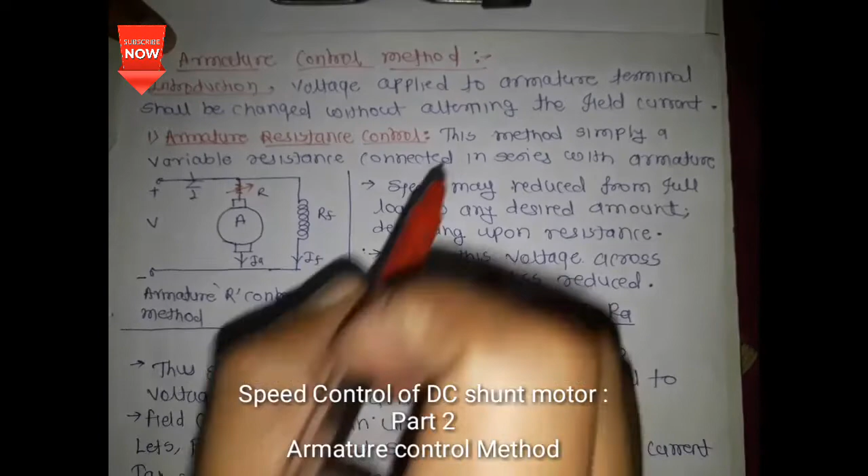Hello friends, now we start the video of armature control method of DC shunt motor. This is the DC shunt motor. Armature control method of DC shunt motor. In the previous lecture, we saw the methods and how we handle these methods. In this video we learn the armature control method.

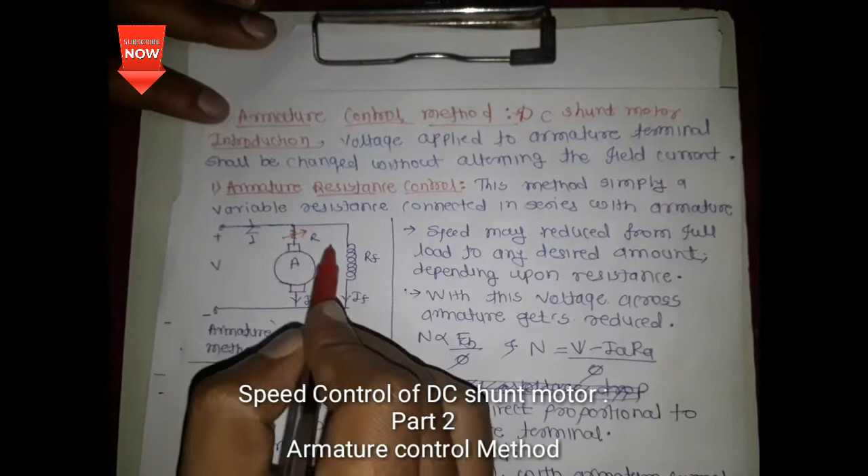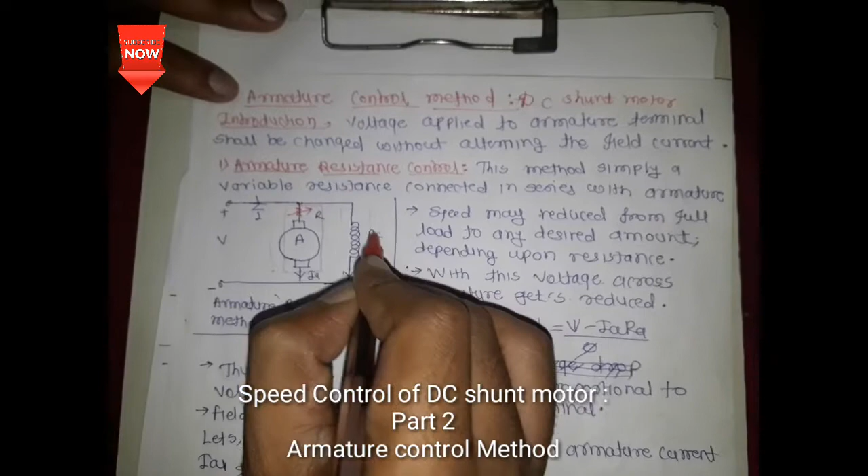Here we control the voltage level in the armature side only. Controlling the voltage level in the armature side only means that there is no change in the flux in the field side. So the first important fact you must remember is that the flux will remain the same in the field system.

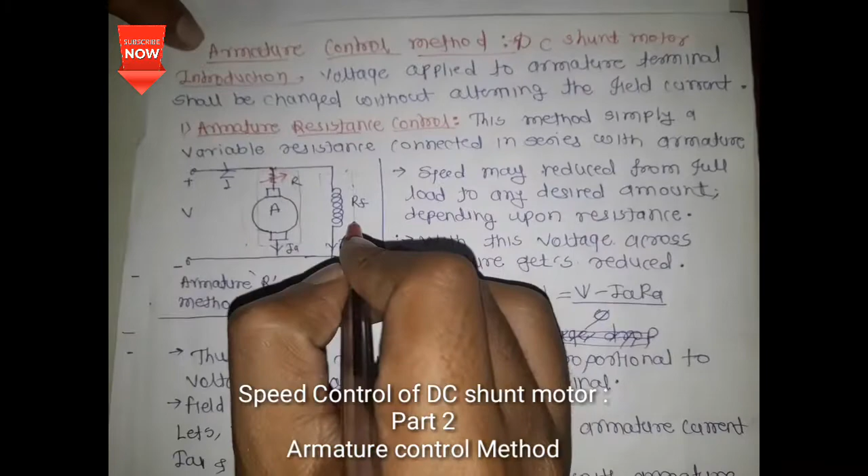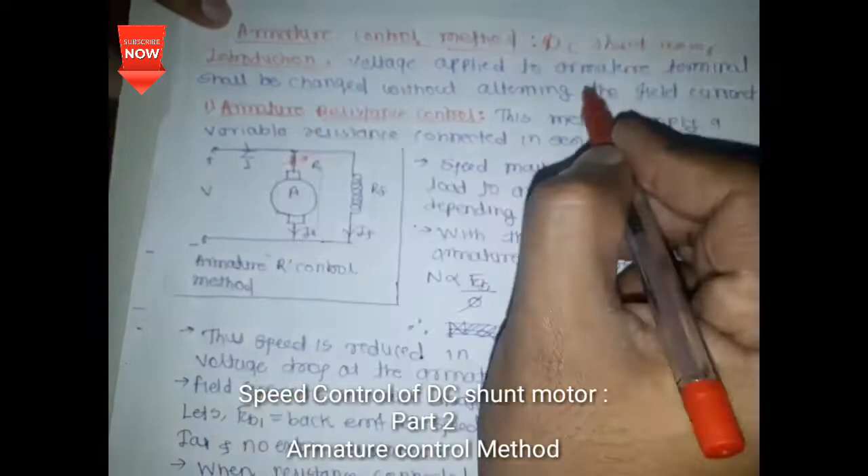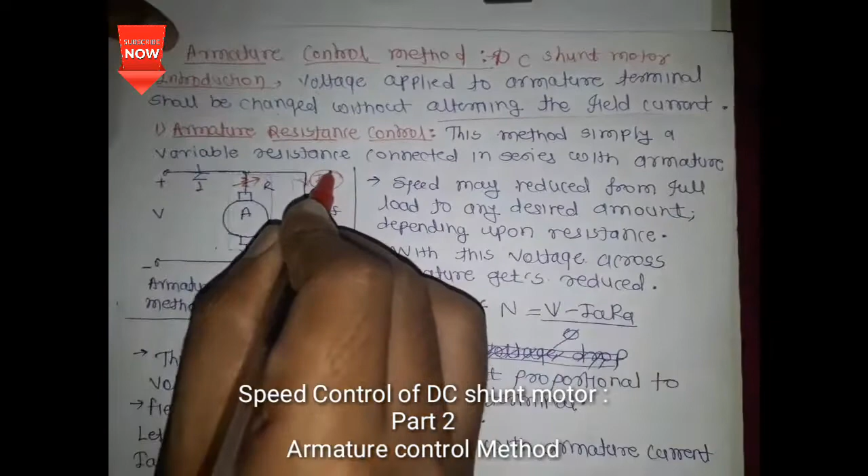In the introduction, we saw that the voltage applied to the armature terminal shall be changed without altering the field current. Means here the field current, that is IF, will remain the same. Whatever may be the condition, IF will remain the same. That point should be noted.

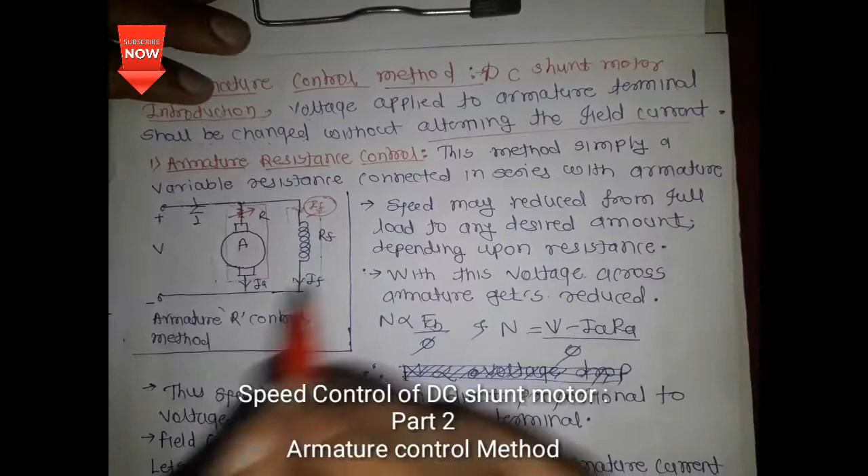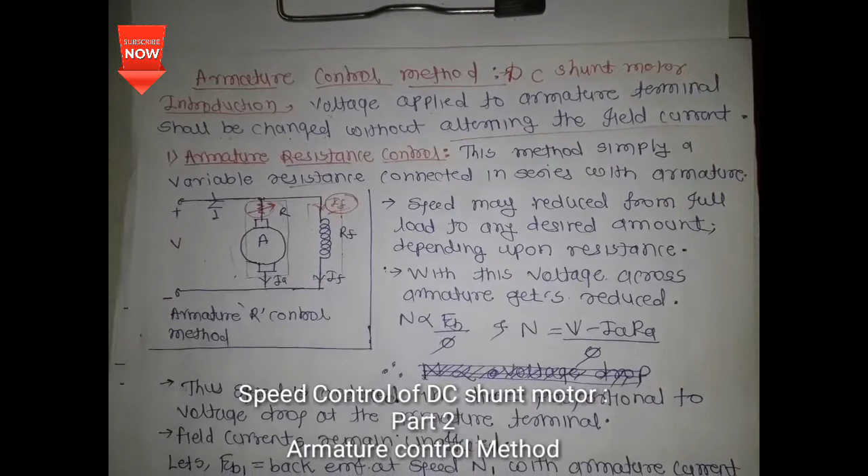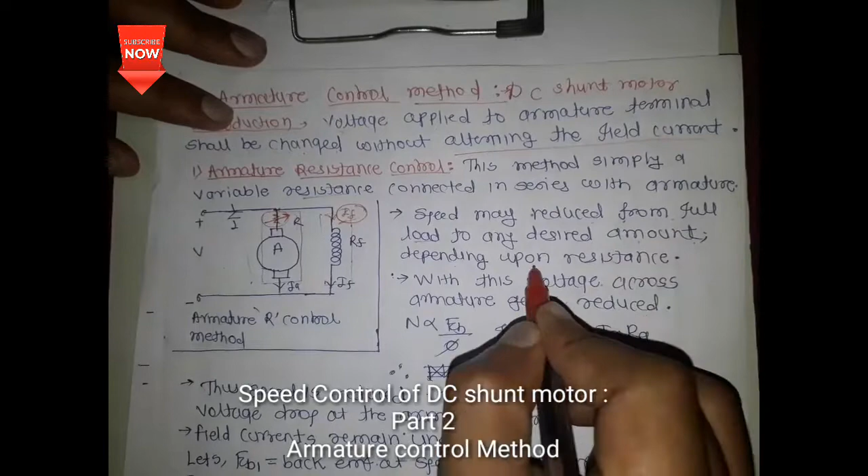Now, armature resistance control method. This is the first method. In this method, simply a variable resistance is connected in series with the armature, meaning a rheostat is connected in series with the armature circuit. Speed may be reduced from full load to any desired amount depending upon this resistance. The speed depends only on that resistance. How this depends we can see later.

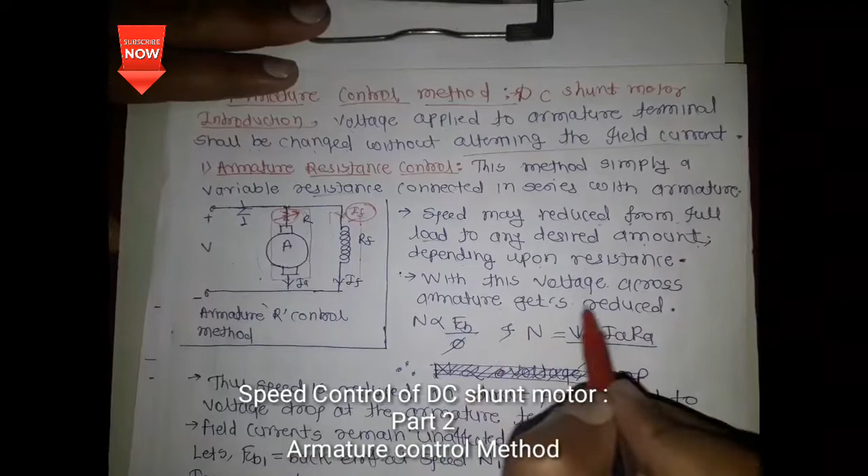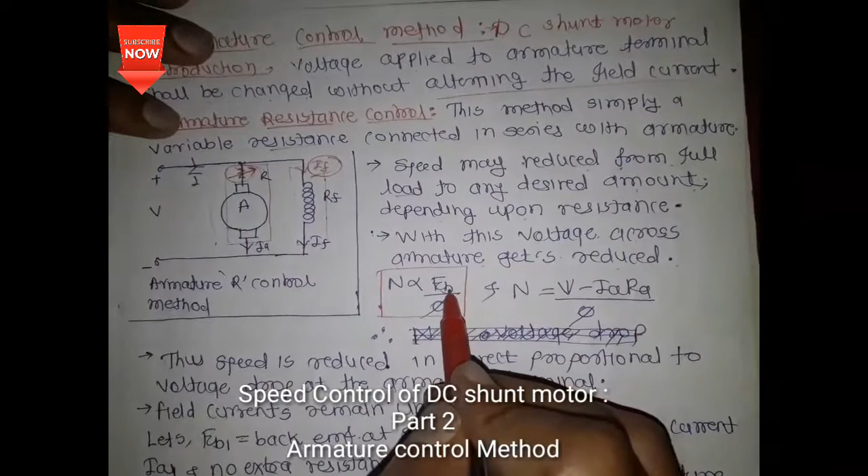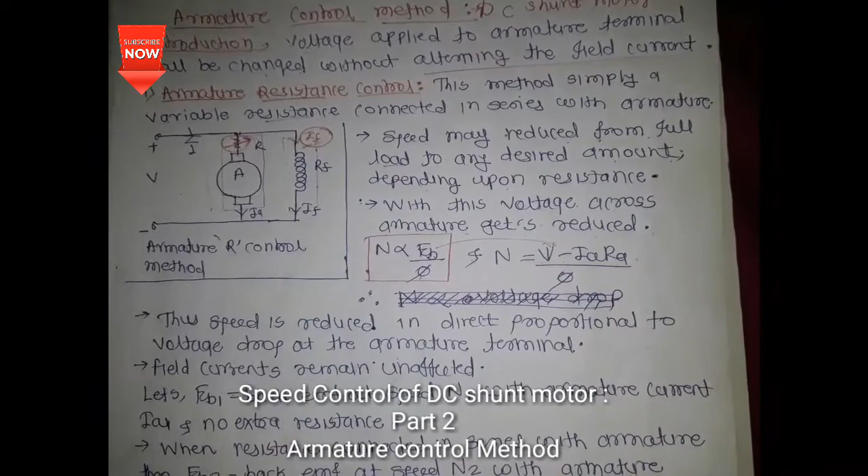With this, voltage across the armature gets reduced. How is this reduced? I told earlier that this is the very basic formula mostly used in the speed control methods: N is directly proportional to EB and inversely proportional to phi. Now EB is equal to V minus IaRa, as told in the voltage equation of the motor.

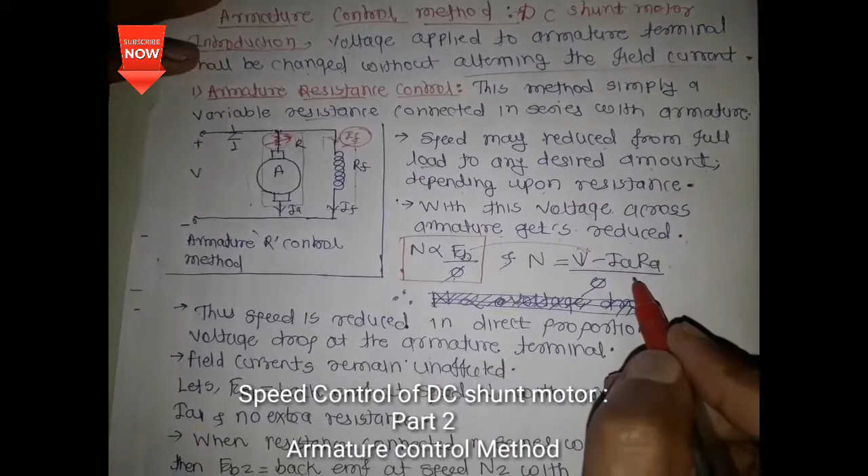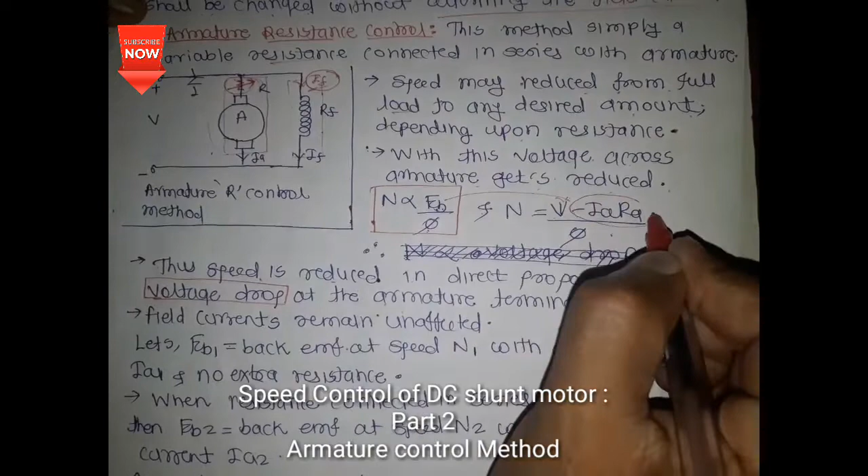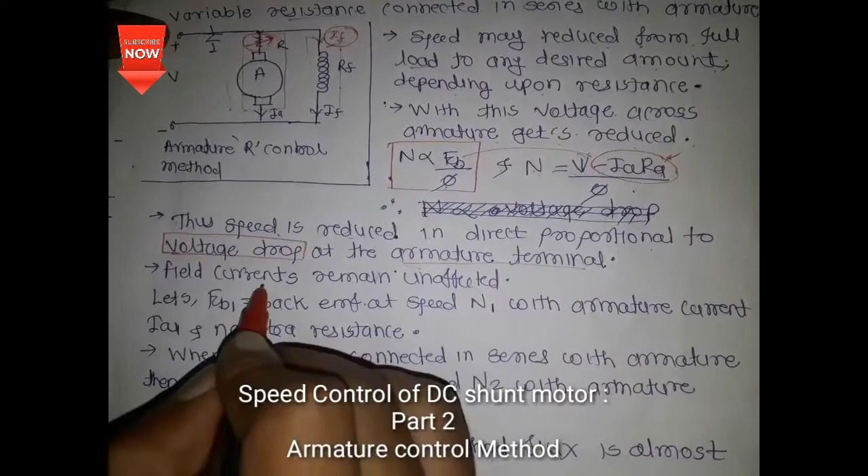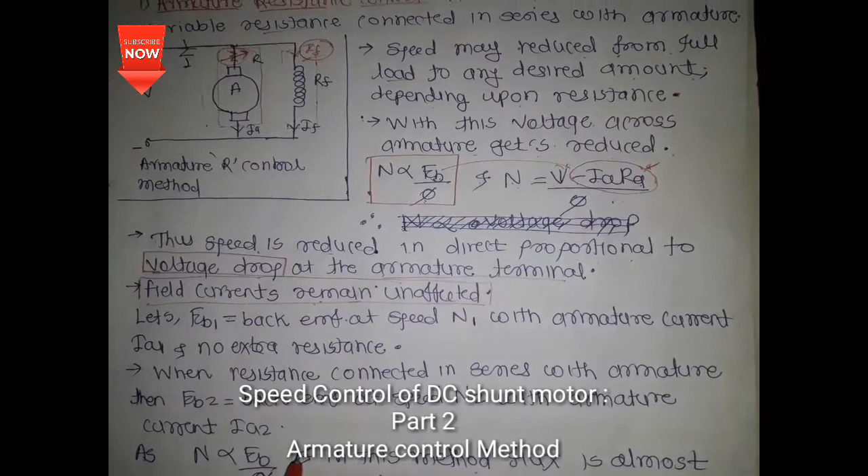Now, the speed is reduced in direct proportion to the voltage drop. As IaRa increases, speed gets reduced at the armature terminals. At the armature terminals, field current remains unaffected. That point you should note in your copy: field current remains unaffected in the armature control method of DC shunt motor.

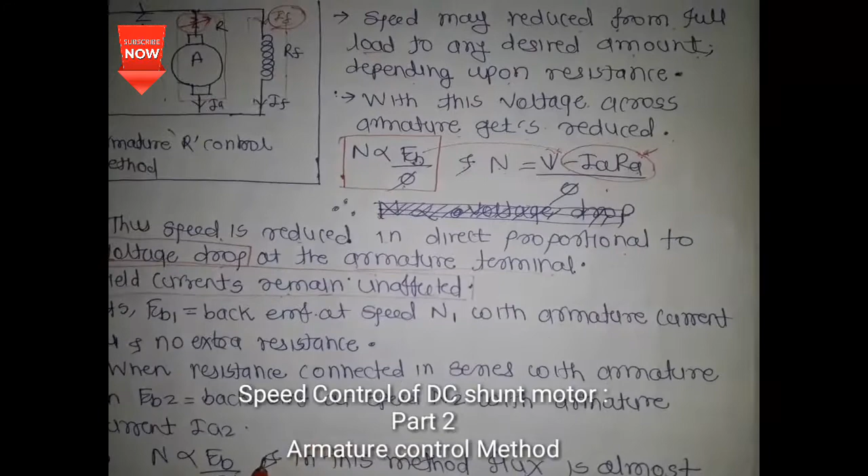In the field control method, the field current gets changed and flux does not remain constant, but in the armature resistance control method, field current remains unaffected.

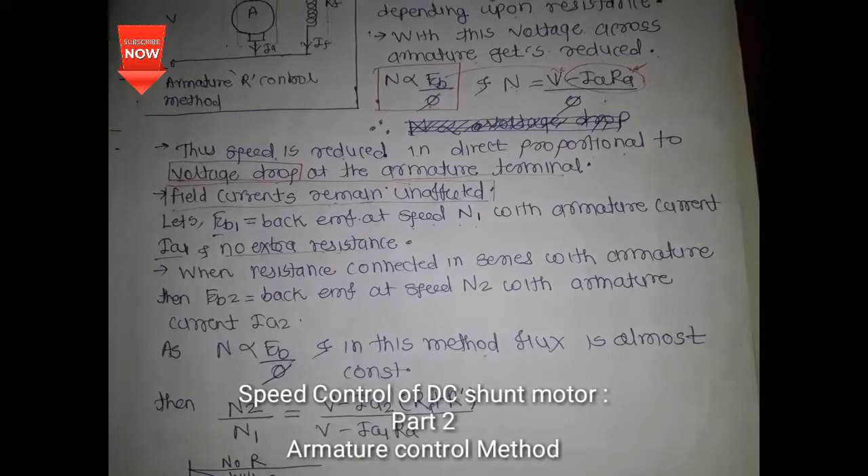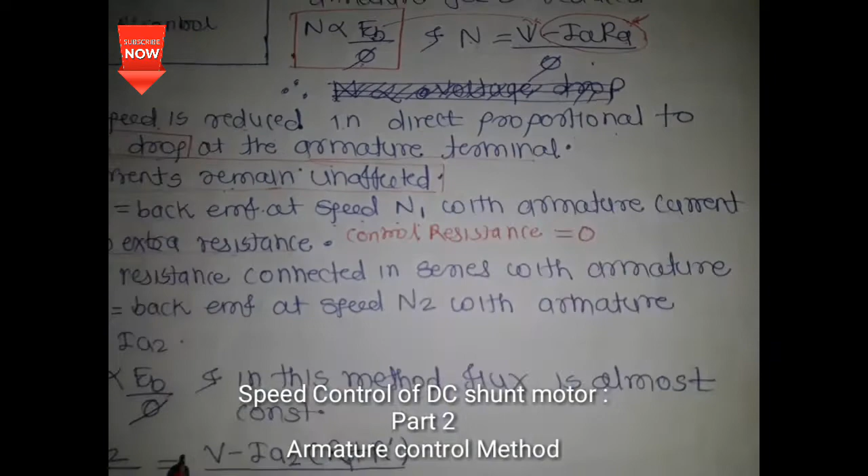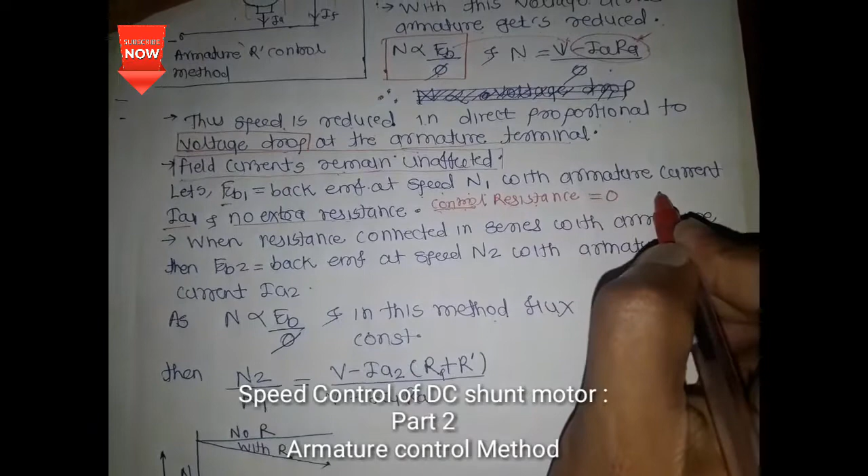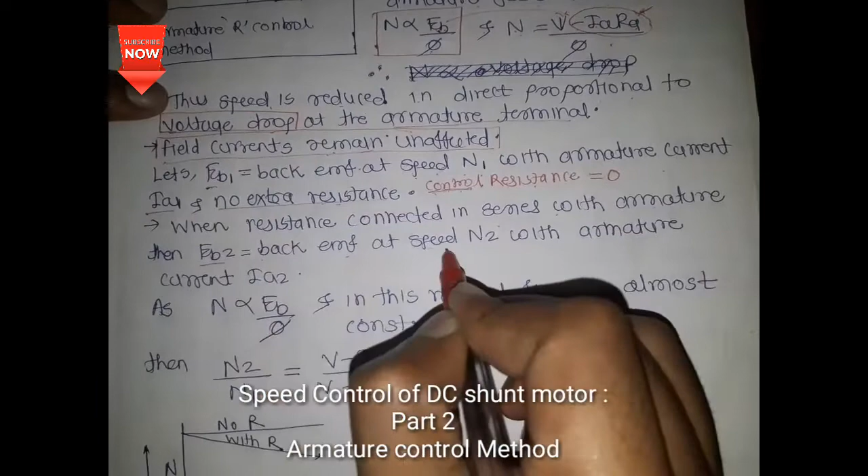Now let EB1 be the back EMF at a speed N1 with armature current IA1 and no extra resistance. No extra resistance means initially the extra resistance, called the control resistance, is equal to 0. By varying this resistance from 0 up to its maximum value, we can change the speed of the DC shunt motor. When resistance is connected in series with the armature, EB2 is the back EMF at speed N2 with armature current IA2.

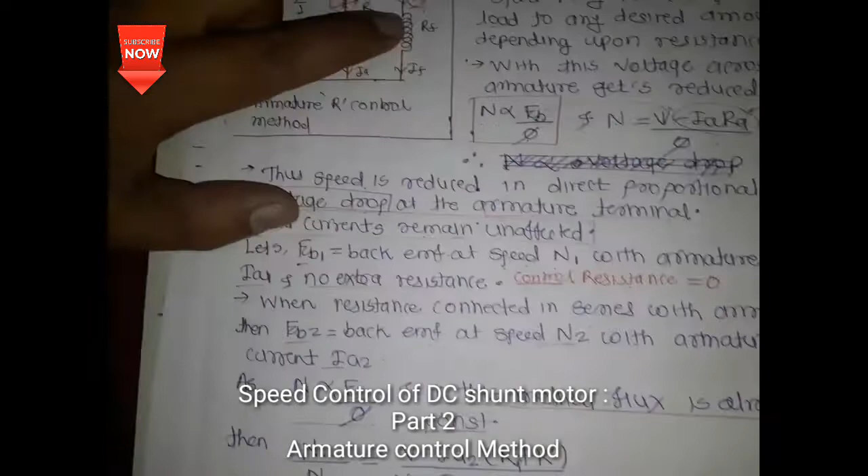This is the very basic formula as we told earlier. In this method, flux is almost constant. You must always remember that in the armature resistance control method, flux remains constant, but in the field control method, flux does not remain constant because we connect resistance in series with the field. Here, the field remains unaffected. Due to that, the flux remains constant, whatever may be the conditions.

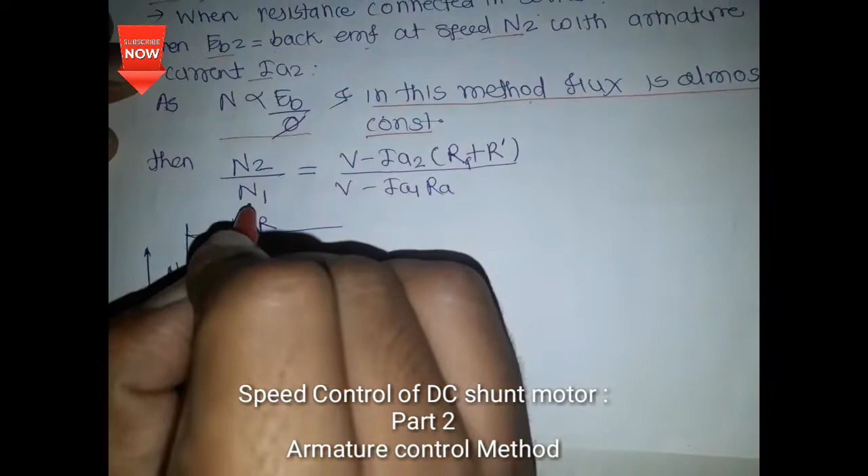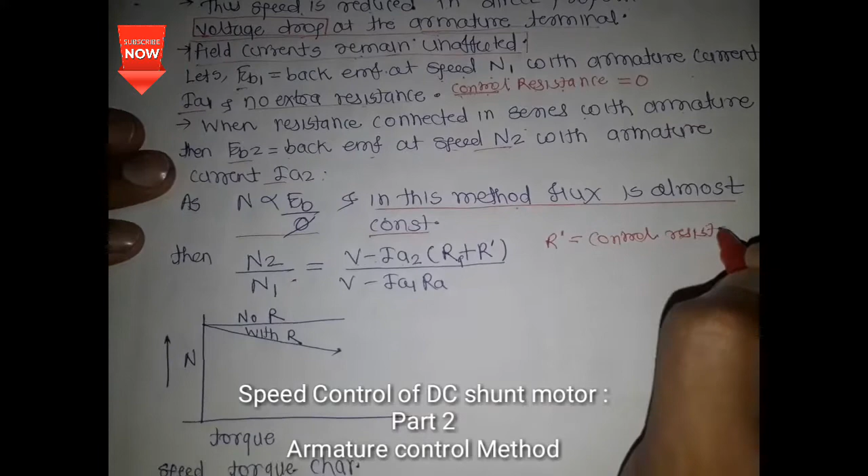Then N2 upon N1 is equal to V minus IA2 (RA plus R dash), where R dash is the control resistance added in the circuit, divided by V minus IA1 RA.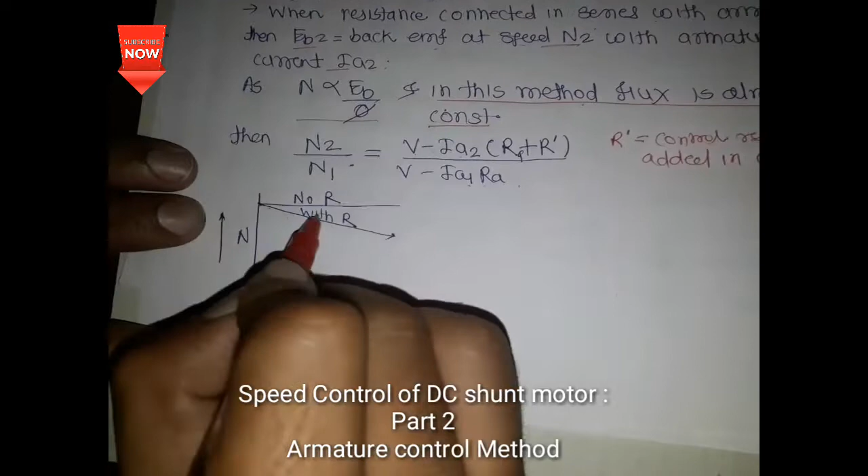This is the speed torque characteristic of DC shunt motor in armature control method. This is the horizontal line, and when we insert a resistance, speed gets reduced. Listen friends, in the DC shunt motor, speed is almost constant and does not vary much, but when we add this resistance, speed gets reduced.

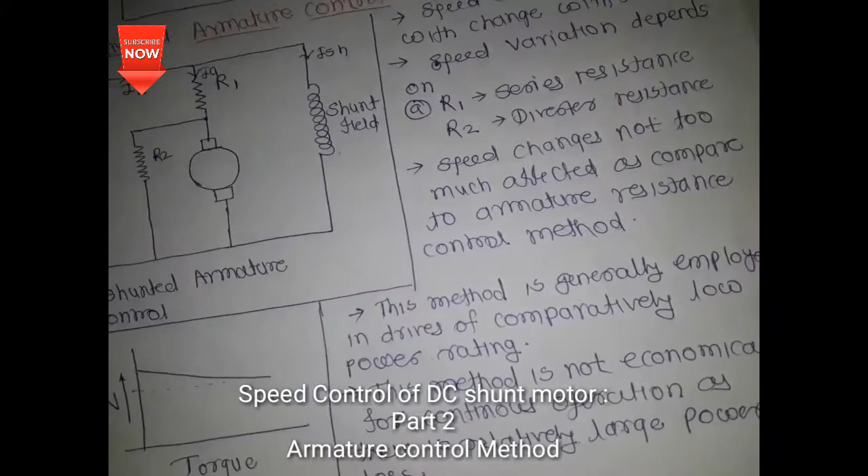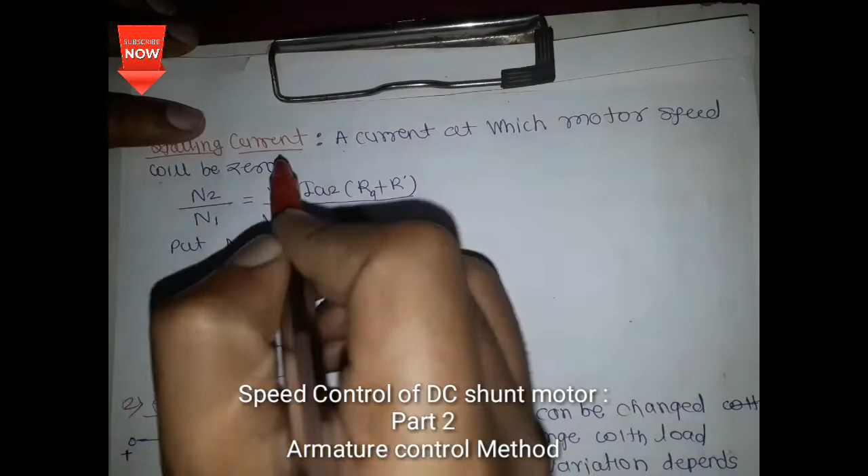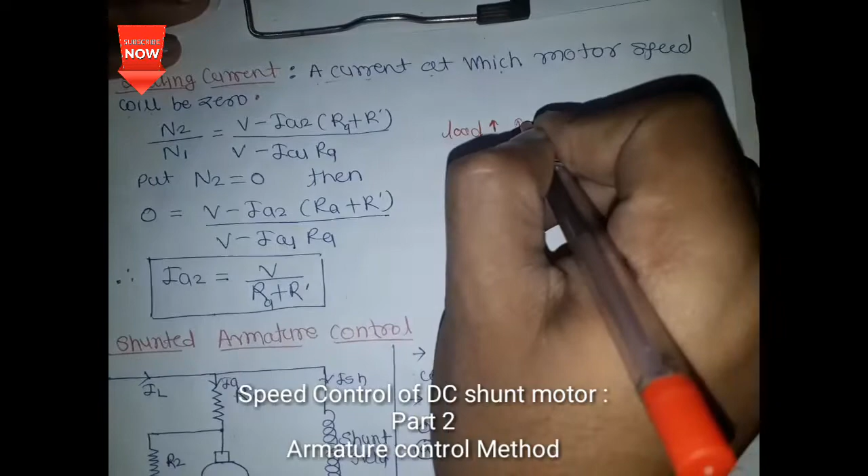Now what is meant by stalling current? A stalling current is nothing but the current at which the motor speed will be zero. As load increases, current increases, and speed decreases.

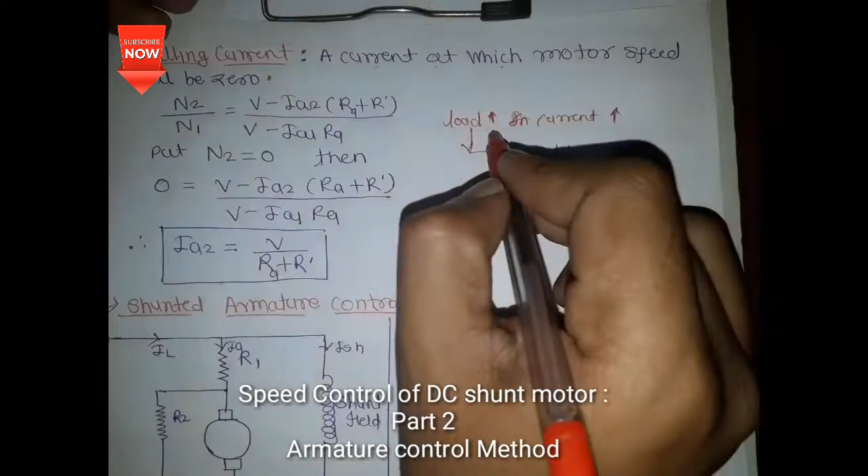Now as we increase the load, current also increases. Again we increase the load, again current increases, but at the same time speed decreases. Due to that, what happens?

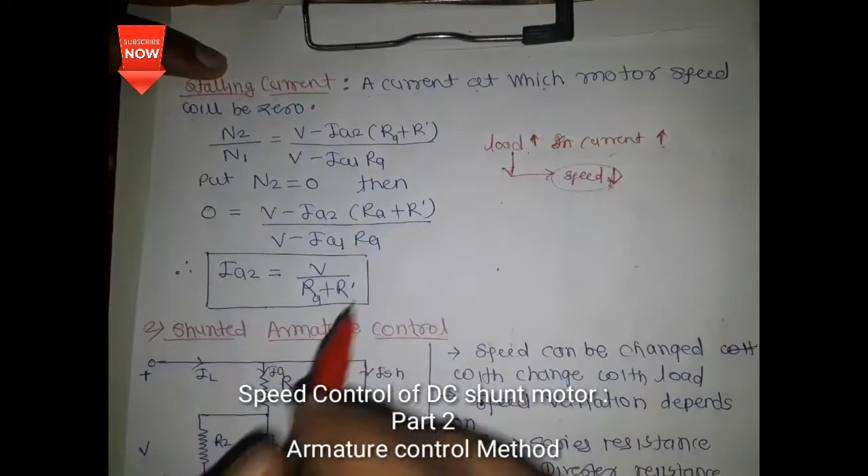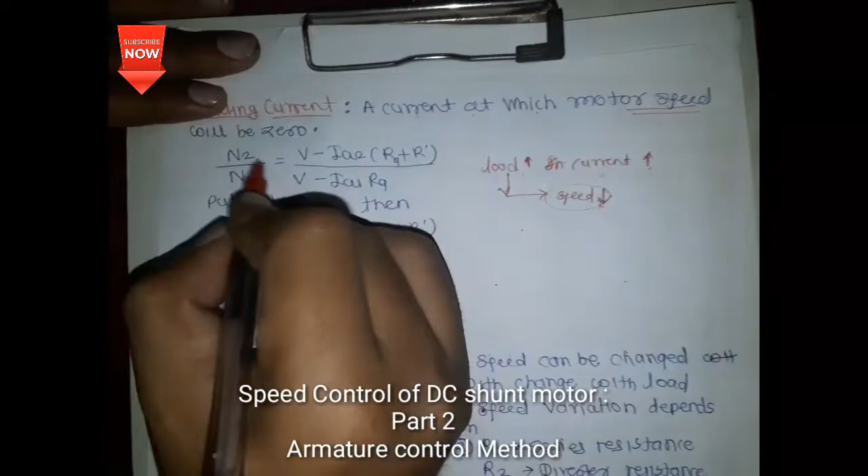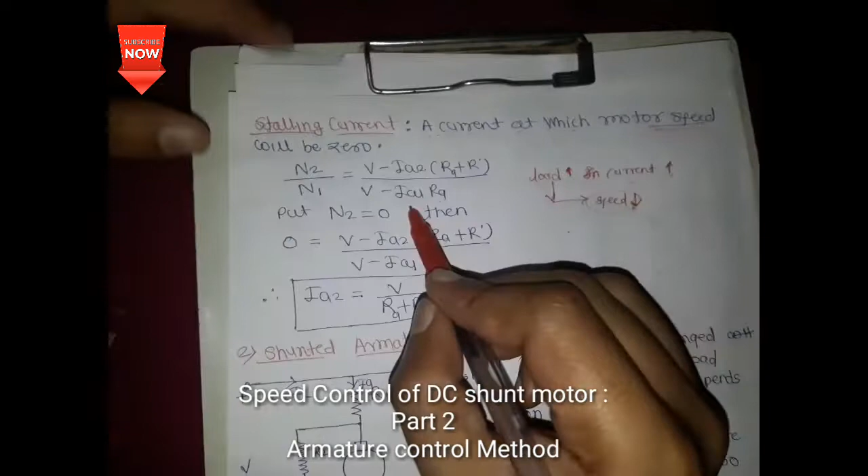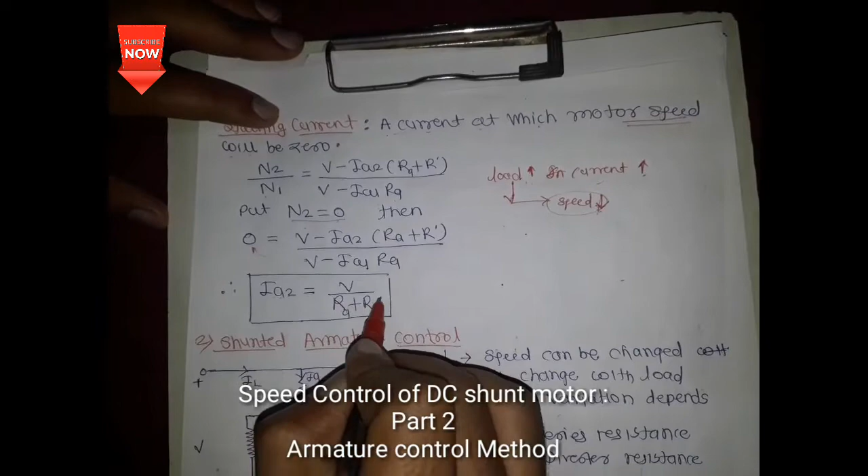And there is some moment when the motor speed will become zero. So N2 upon N1 is equal to (V minus IA2(RA plus R dash)) over (V minus IA1 RA). Now as the speed gets zero, what happens here? Speed zero means what? This is called the stalling current. When speed gets zero, from this equation, IA2 is equal to V over (RA plus R dash). This is nothing but the stalling current.

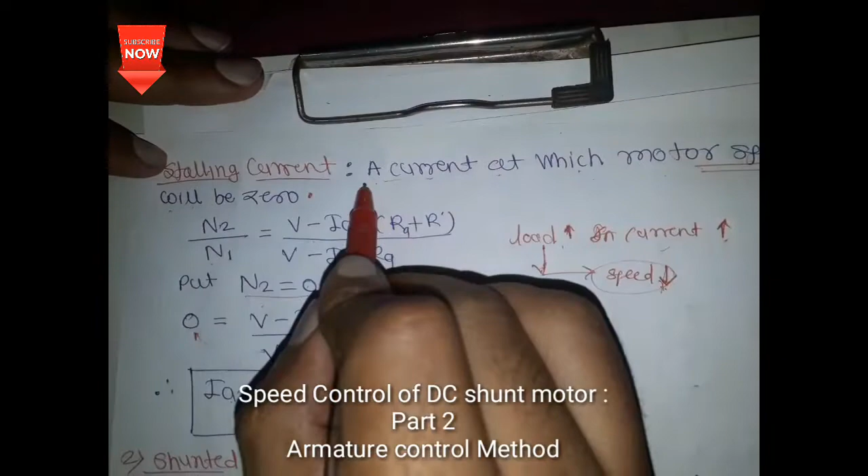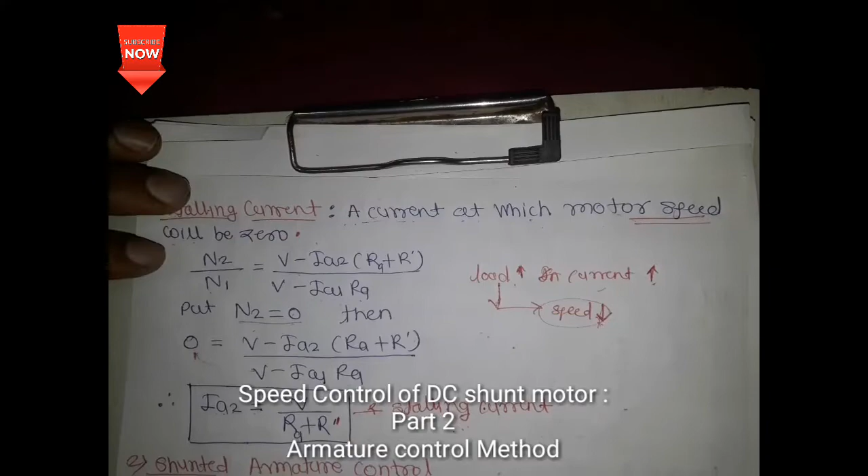You must remember that. Stalling current means what? A current at which the motor speed will become zero. You can calculate the stalling current from this formula which is seen here.

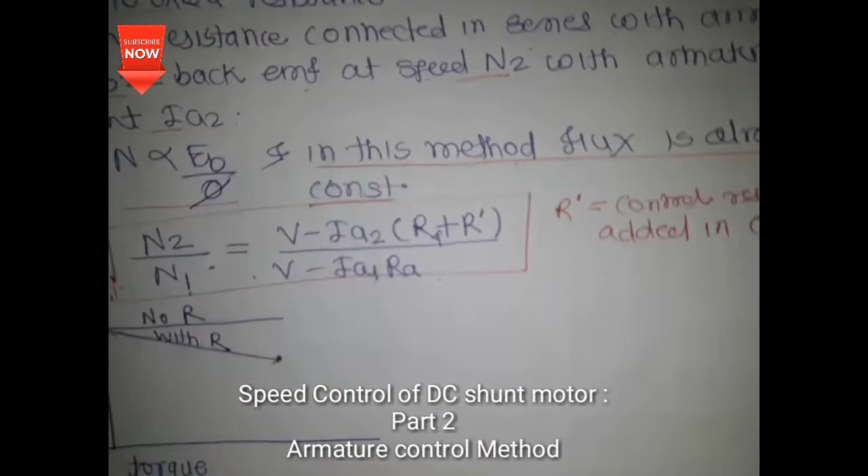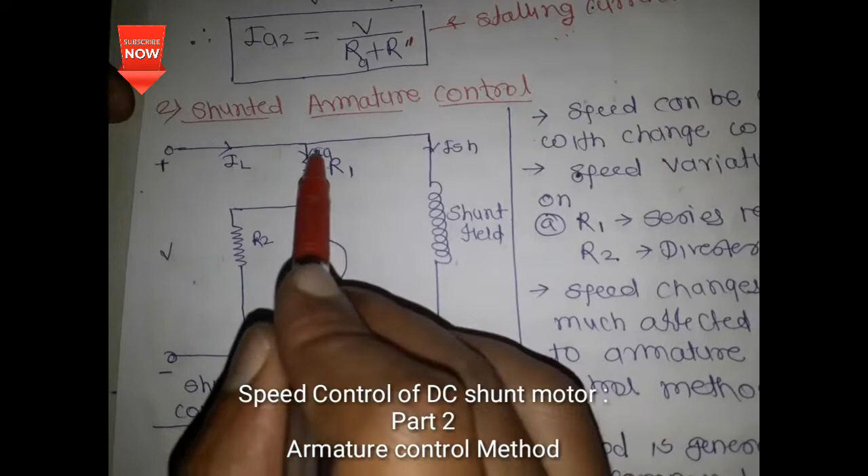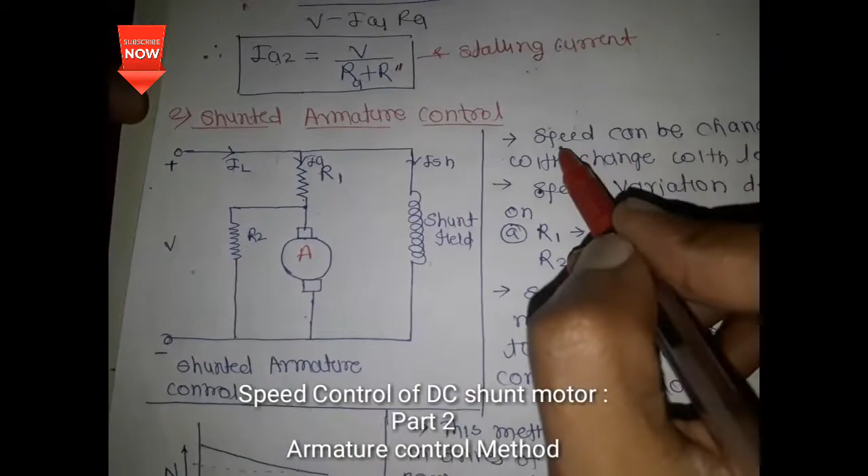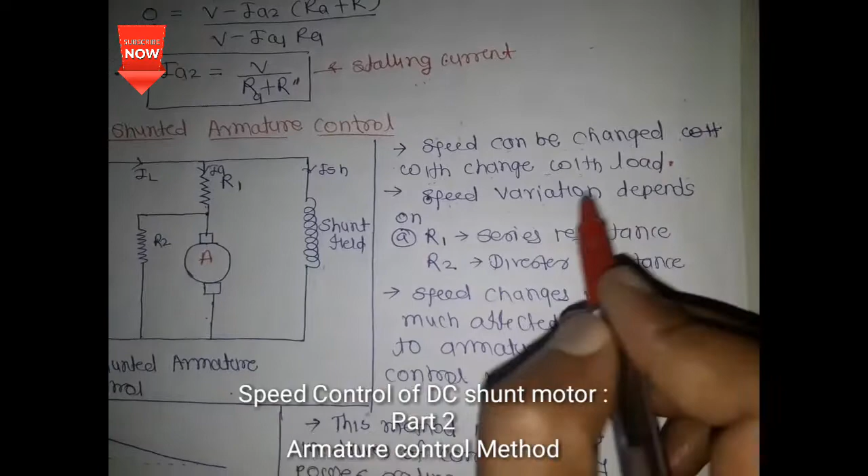Now next is the shunted armature control. In this, a resistance in series is also present, but the armature is shunted by another resistance. Here speed can be changed with load. In the previous method, the armature control method, speed variation depends only on the series resistance, but here the speed variation depends on the series resistance as well as the diverter resistance.

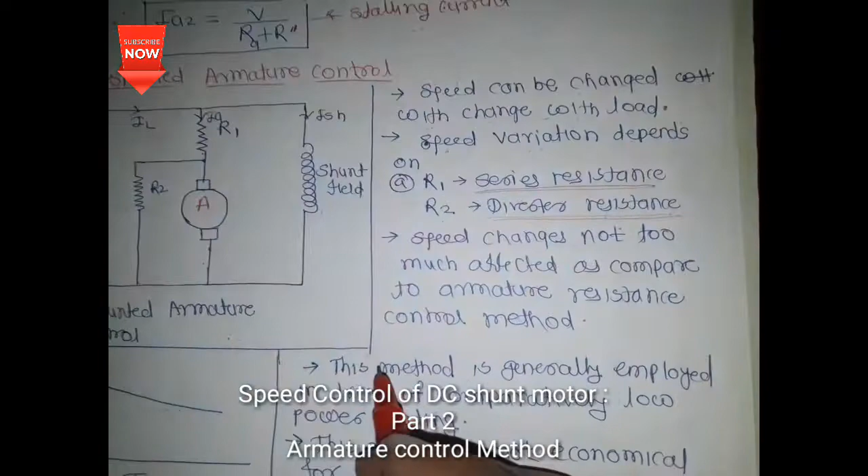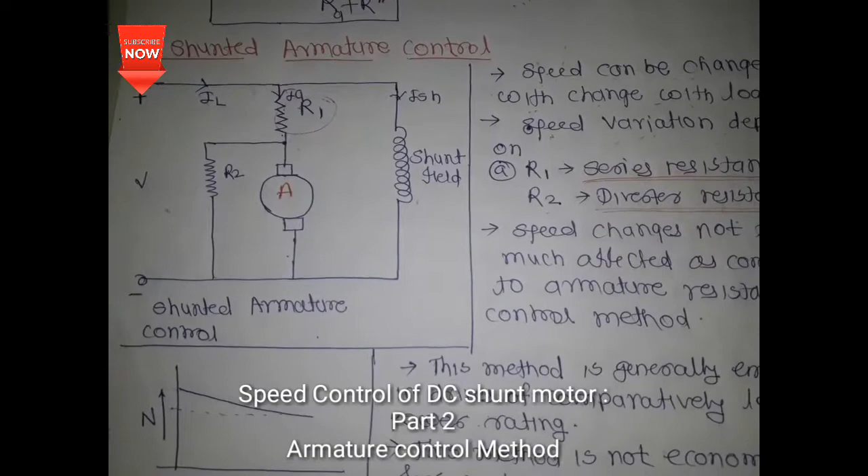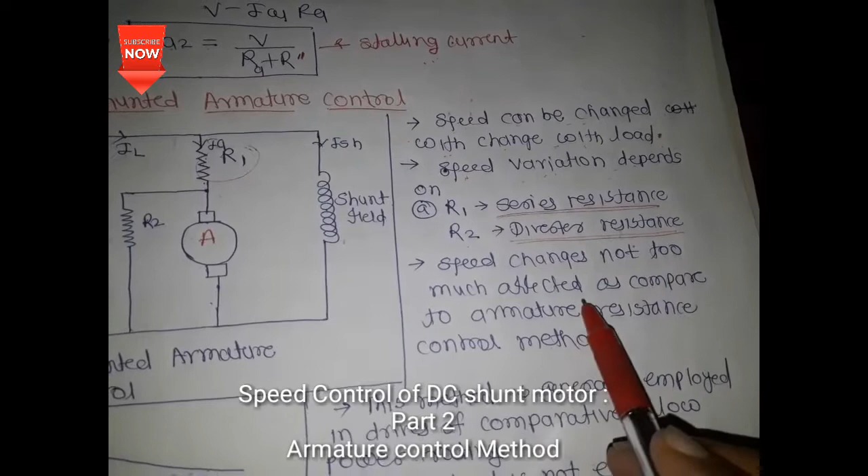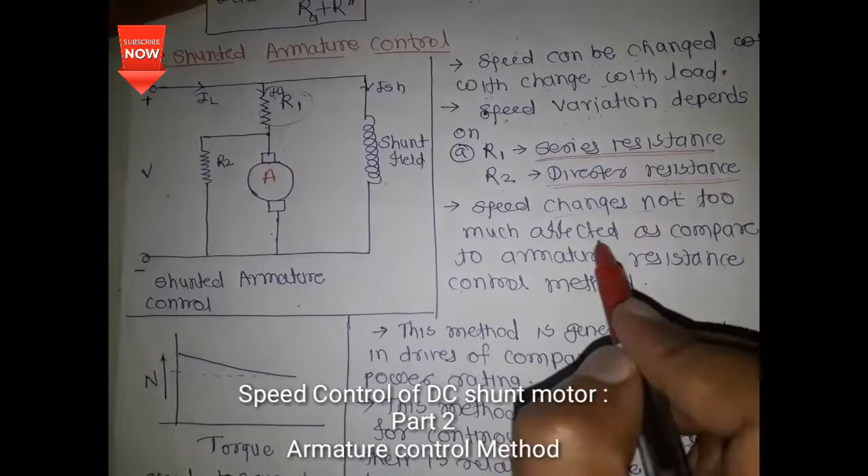Speed here depends on this series resistance and this diverter resistance. Here the speed change is not much affected as compared to the armature resistance control method. In the armature resistance control method, whenever we insert a resistance, the speed is affected greatly, so speed regulation is very poor, but in this method the speed change is not much affected.

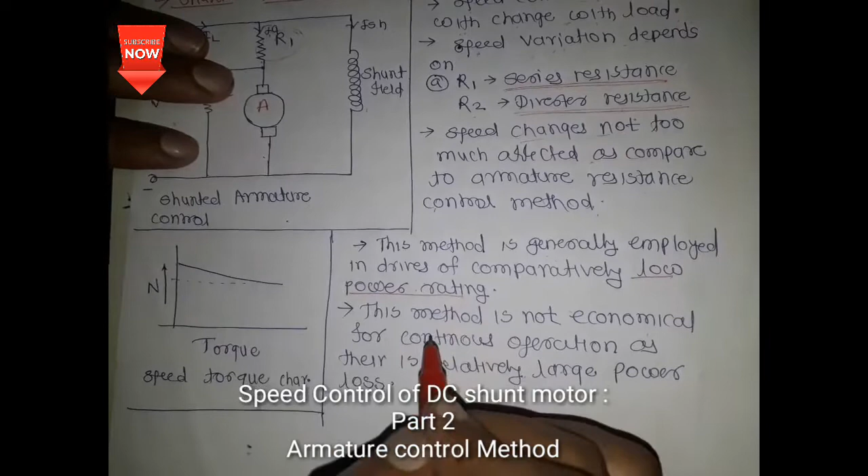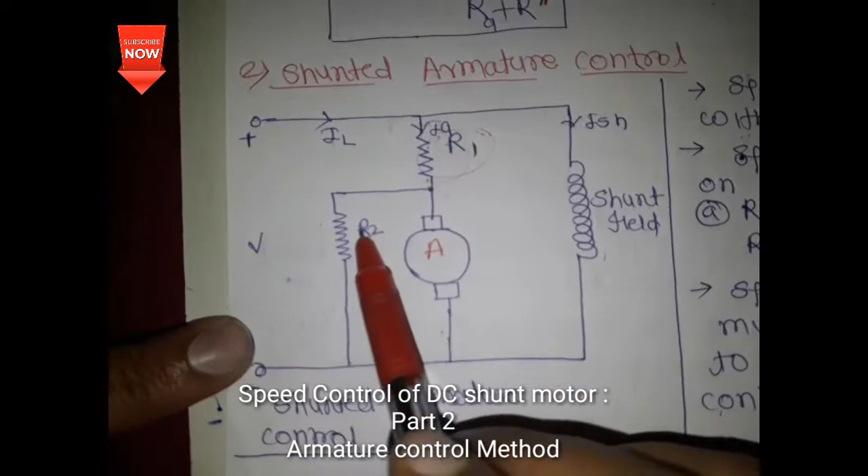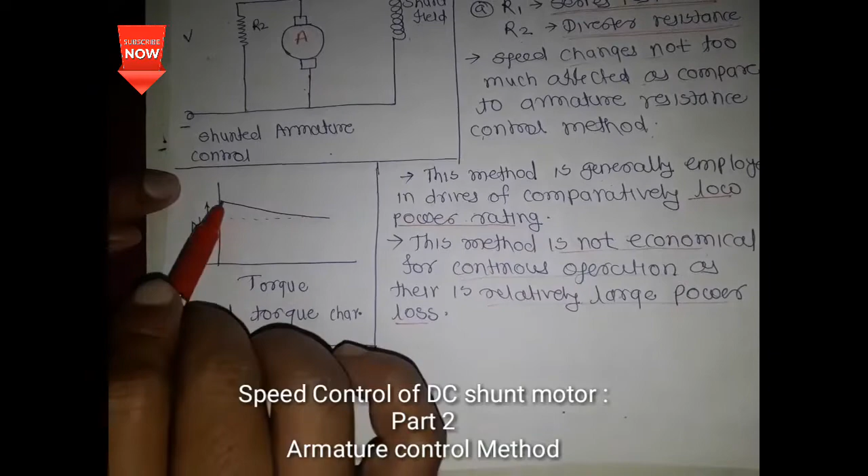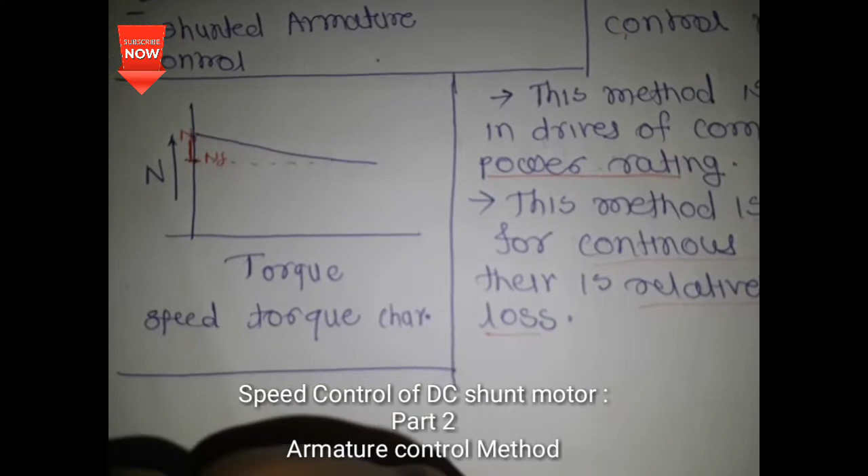This method is generally employed for drives of comparatively low power rating. This method is not economical for continuous operation as there is a relatively large power loss. How is that possible? Because there are two resistances present, R1 and R2. Due to these two heavy resistances, I square R losses increase. This is the speed torque characteristic: from full load to no load, there is a relatively small change in speed.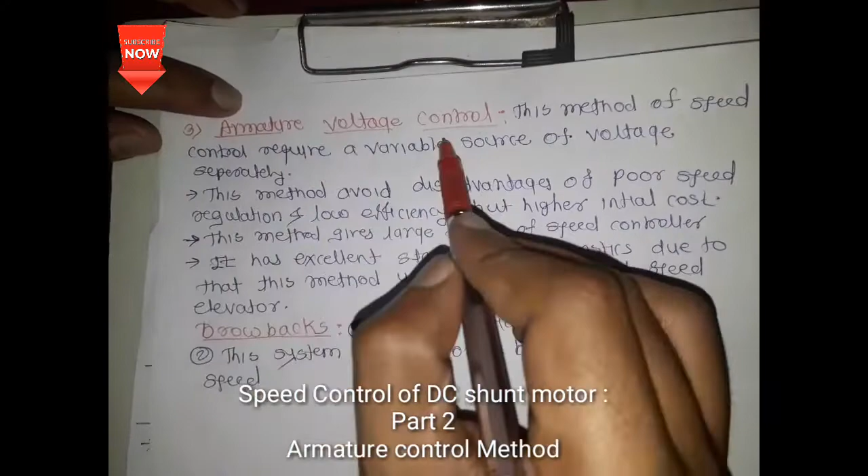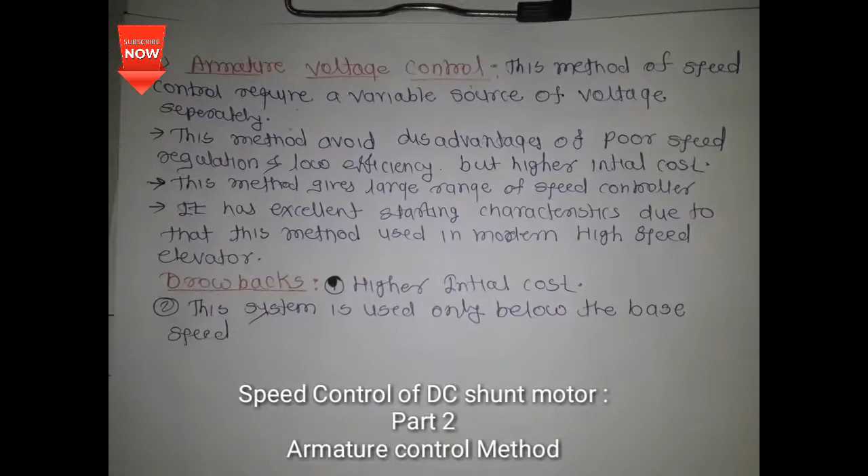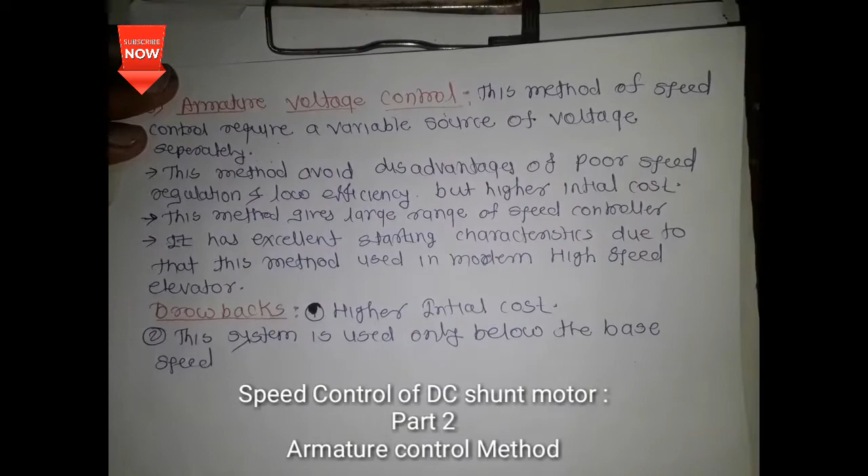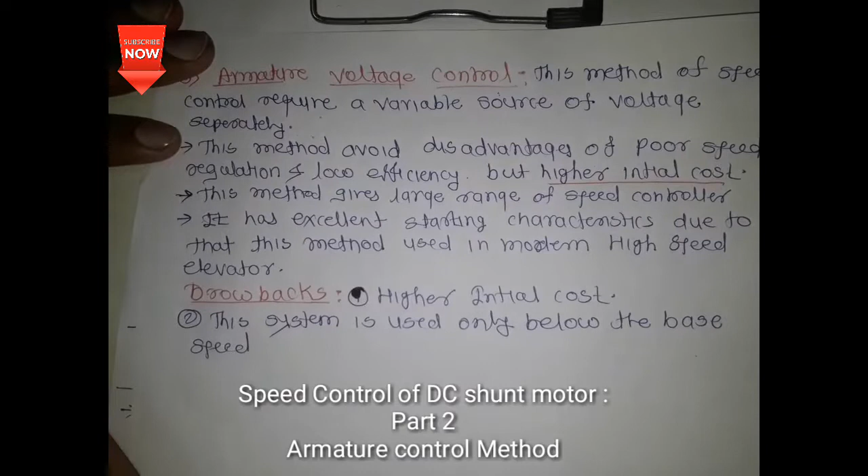Now we learn the third and last method, the armature voltage control method. This method of speed control requires a separate variable source of voltage. This method avoids the disadvantages of poor speed regulation and low efficiency, but has a higher initial cost, because separate voltage control devices are used. A generator may also be used to control the voltage level in the armature.

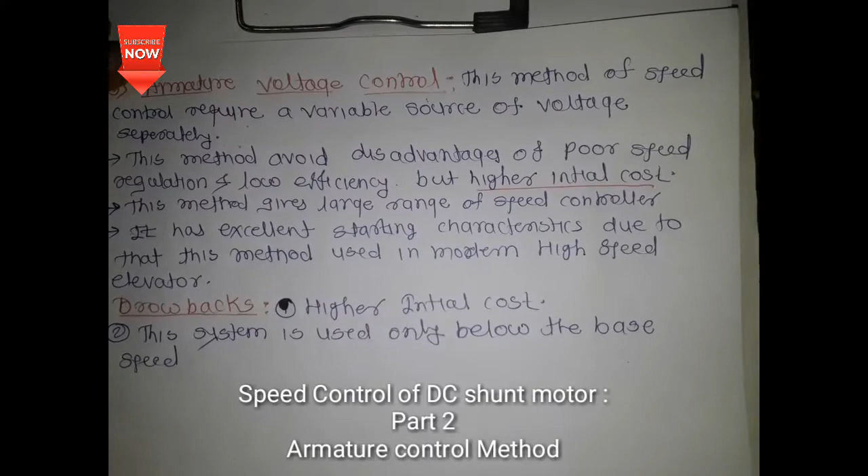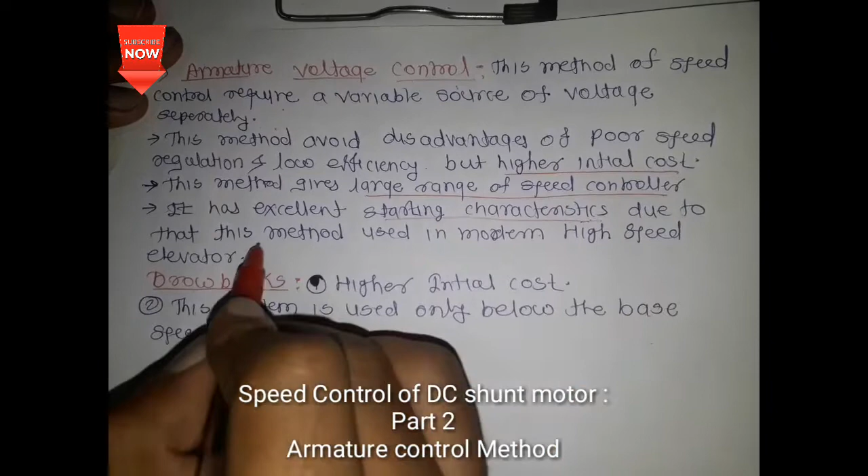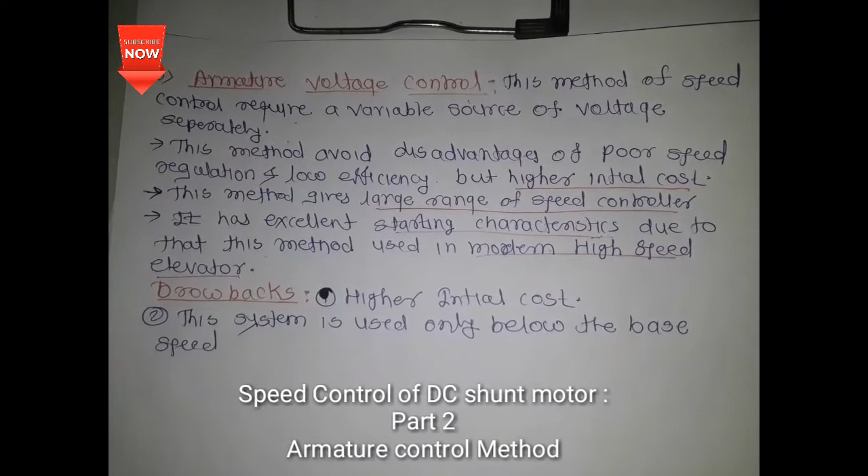This method gives a large range of speed control. It has excellent starting characteristics because we can easily control the speed level due to the external source. Due to that, this method is used in modern high speed elevators. But there are certain drawbacks. First, since a separate generator is used in the armature circuit, it has a higher initial cost.

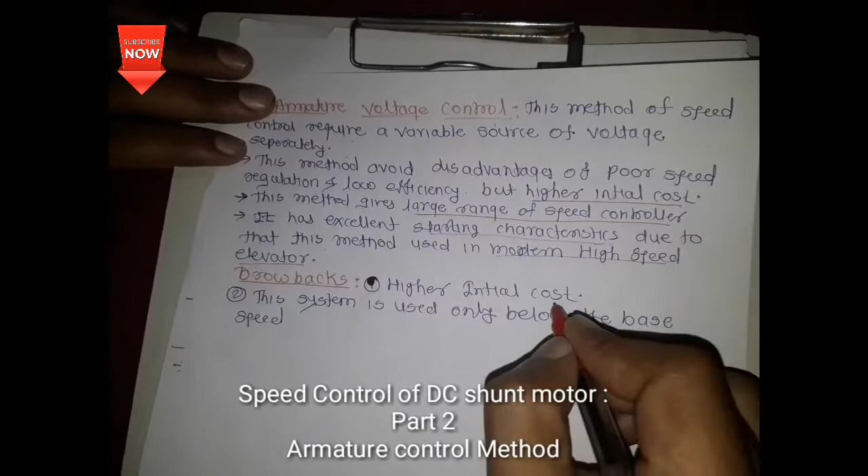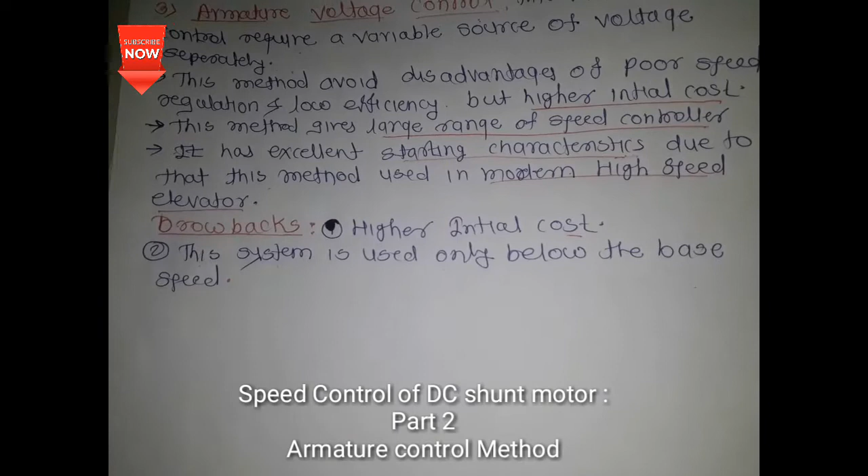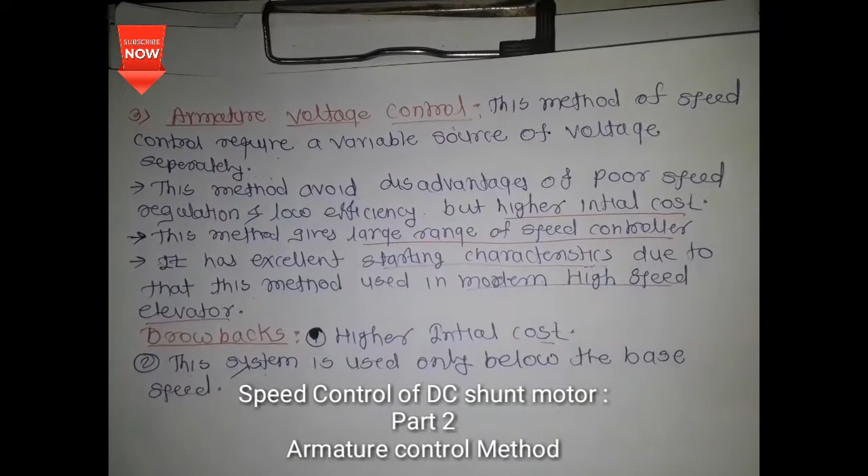Second, this system is used only below the base speed. We can control the speed only below the base speed; we cannot raise the speed above the base level. These are some disadvantages of this method. So here we learned the armature control methods: first, the armature resistance control method, second, the shunted armature control method, and third, the armature voltage control method.